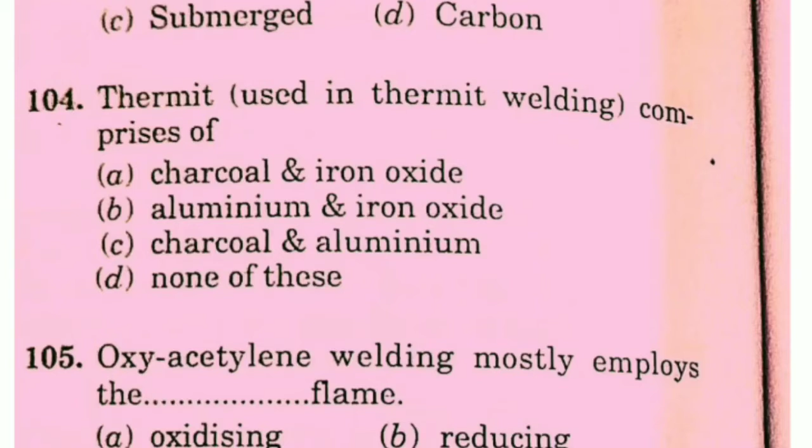Oxyacetylene welding mostly employs the neutral flame. Next, dash welding is usually used to join the ends of two pipes of uniform cross section. Answer: A, offset butt welding. Next, edges of plates do not require beveling if their thickness is less than 5 millimeter.

If T is the thickness of the plate to be spot welded, the electrode tip diameter should be equal to root T. Next, which is a multi-spot welding process? Projection welding, seam welding, both, or neither. Answer: A, projection welding.

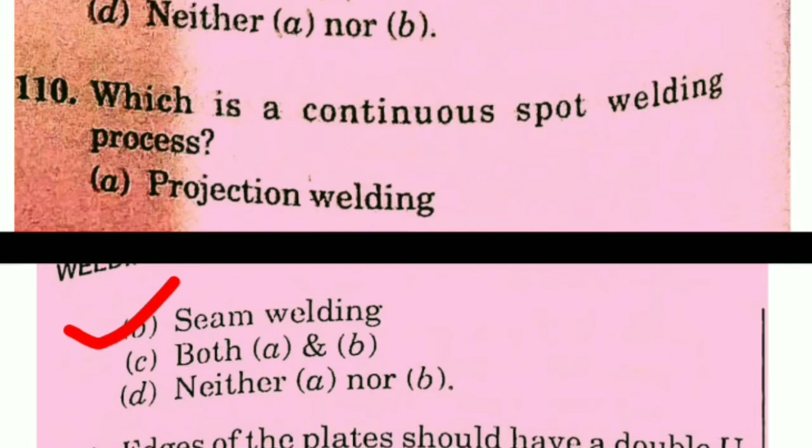Which is a continuous spot welding process? Answer: B, seam welding. Next, edges of the plate should have double U or V grooves on both sides for welding if their thickness is greater than 12.5 millimeter.

Mild steel shanks are joined to high speed drills by flash butt welding. Next, the spacing between two spot welds in spot welding should be greater than 3D.

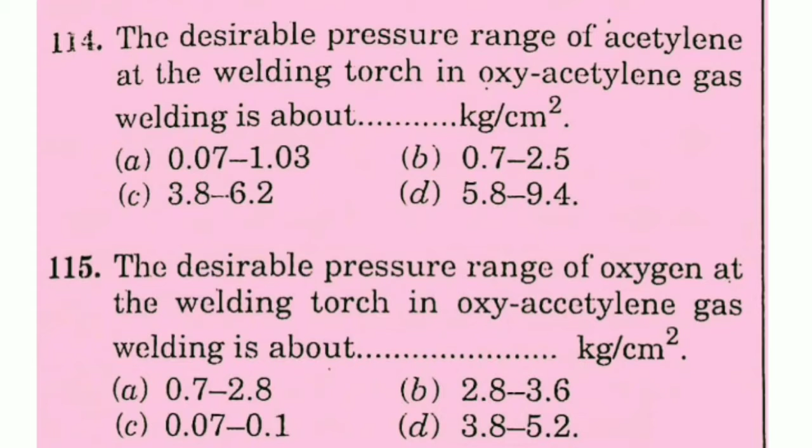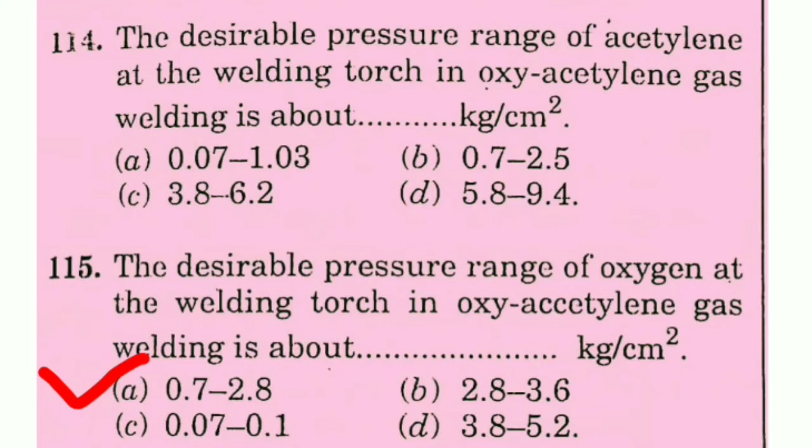The desirable pressure range of oxygen at the welding torch in oxyacetylene gas welding is about 0.7 to 2.8 kg per centimeter square.

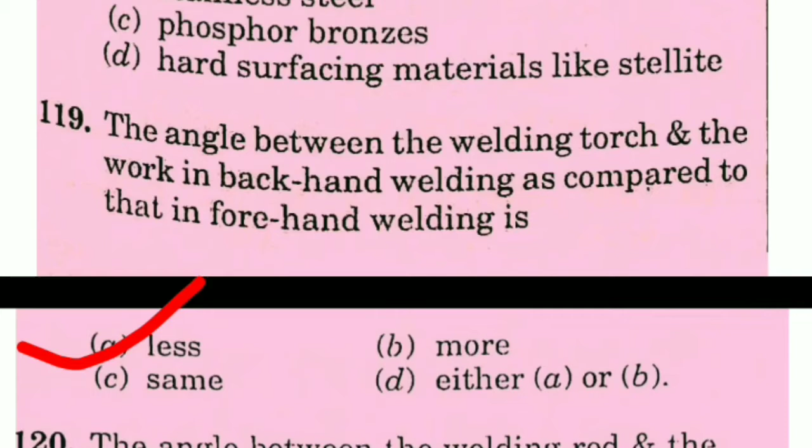The angle between the welding torch and work in backhand welding as compared to that in forehand welding is less, more, same, or A and B. The correct answer is less. The angle between the welding torch and work in backhand welding as compared to forehand welding is less. Next, the angle between the welding rod and the work in forehand welding as compared to that in backhand welding is less, more or same. The angle between the welding rod and the work in forehand welding as compared to backhand welding is more, less or same. The correct answer is C, same.

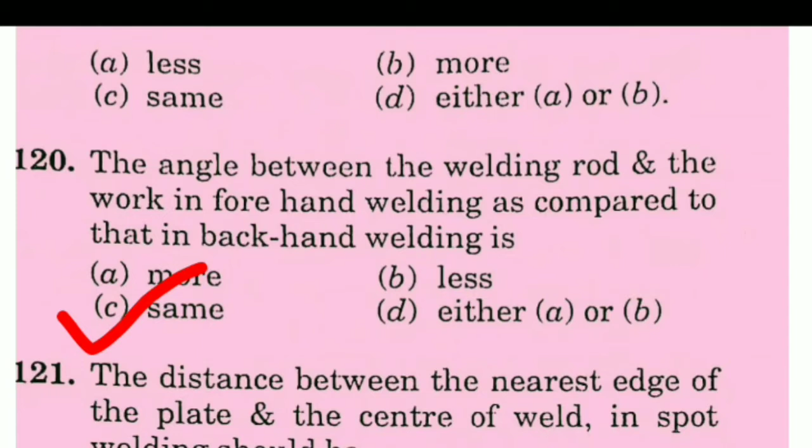Lap joints are preferred for plate having thickness dash millimeter. The correct answer is C, less than 3 millimeter. Lap joints are preferred for plates having thickness less than 3 millimeter.

A pool of molten metal is used in dash arc welding - MIG, TIG, submerged or carbon. The correct answer is submerged. A pool of molten metal is used in submerged arc welding.

Arc is produced between dash electrode and the work in submerged arc welding - bare metal, carbon, metal, none of these. The correct answer is A, bare metal. Arc is produced between a bare metal electrode and the work in submerged arc welding.

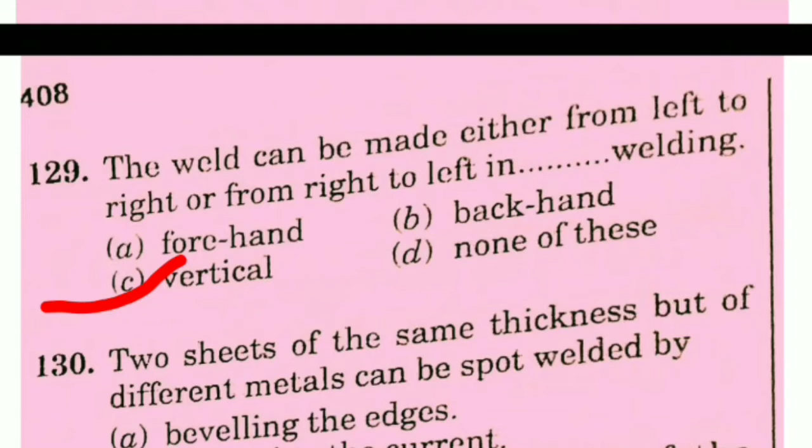The weld can be made either from left to right or from right to left in dash welding - forehand, backhand, vertical, or none of these. The correct answer is C, vertical. The weld can be made either from left to right or from right to left in vertical welding.

Two sheets of the same thickness but of different metal can be spot welded by beveling the edges, increasing the current, changing the size of one of the electrodes, or none of these. The correct answer is C, changing the size of one of the electrodes.

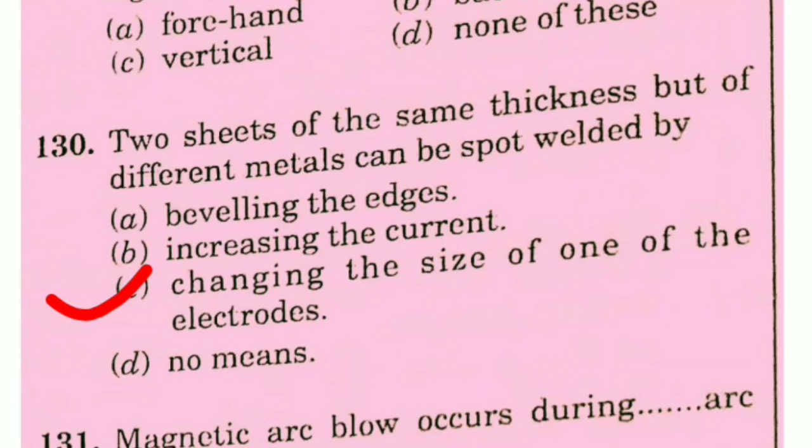The correct answer is B, DC arc welding. The magnetic arc blow occurs during DC arc welding.

During arc welding, the current intensity depends upon the thickness of the plate, electrode diameter, method of edge preparation, or nature of metal. The correct answer is B, electrode diameter. During arc welding, the current intensity depends upon the electrode diameter.

Plates of dissimilar materials of different thickness can be spot welded by beveling the edges, increasing the gap between the plates, controlling the pressure and current, or no means. The correct answer is C, controlling the pressure and current.

Plates of dissimilar materials of different thickness can be spot welded by controlling the pressure and current.

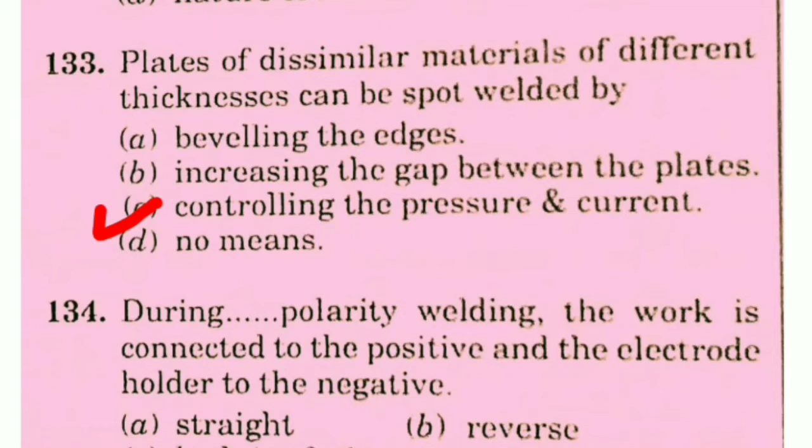During dash polarity welding, the work is connected to the positive and the electrode holder to the negative - straight, reverse, both A and B, or neither A nor B. The correct answer is A, straight.

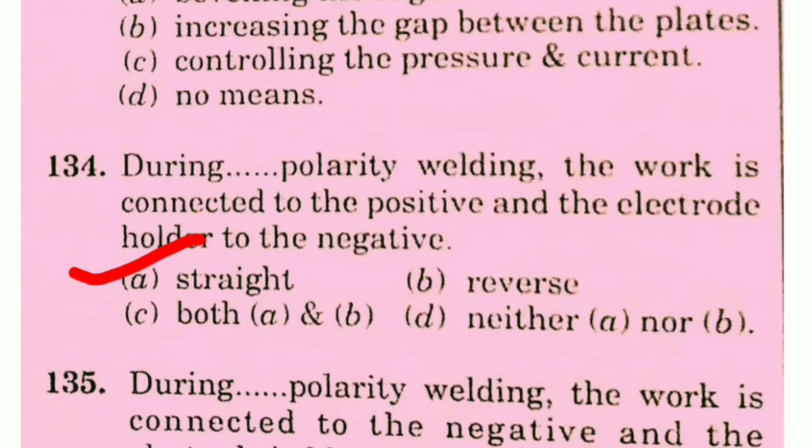During straight polarity welding, the work is connected to the positive and the electrode holder to the negative.

During straight or reverse polarity welding, the work is connected to the negative and the electrode holder to the positive? Straight, reverse, both A and B, or neither A nor B. The correct answer is B, reverse.

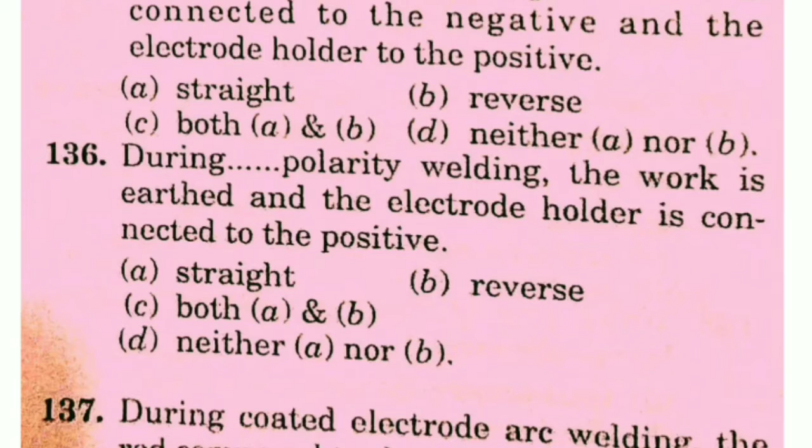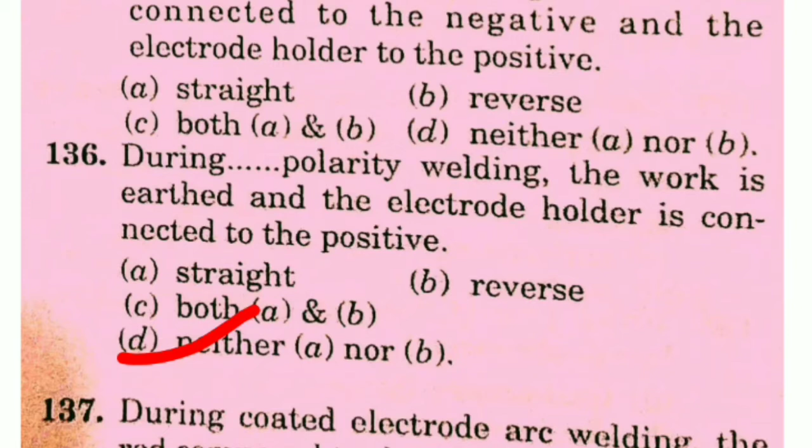During reverse polarity welding, the work is connected to the negative and the electrode holder to the positive. During dash polarity welding, the work is earth and the electrode holder is connected to the positive. Straight, reverse, both A and B, or neither A nor B? The correct answer is D, neither A nor B, meaning neither straight nor reverse.

During coated electrode arc welding, does the rod compared to the coating melt earlier, later, simultaneously, or either earlier or later depending on the polarity used during welding? The correct answer is A, earlier. During coated electrode arc welding, the rod compared to the coating melts earlier.

In which type of welding is a mixture of iron oxide and powdered aluminium ignited by heating? Carbon arc welding, thermit welding, resistance welding, or none of these. The correct answer is B, thermite welding.

In which type of welding is a mixture of iron oxide and powdered aluminium ignited? Thermite welding. Next,

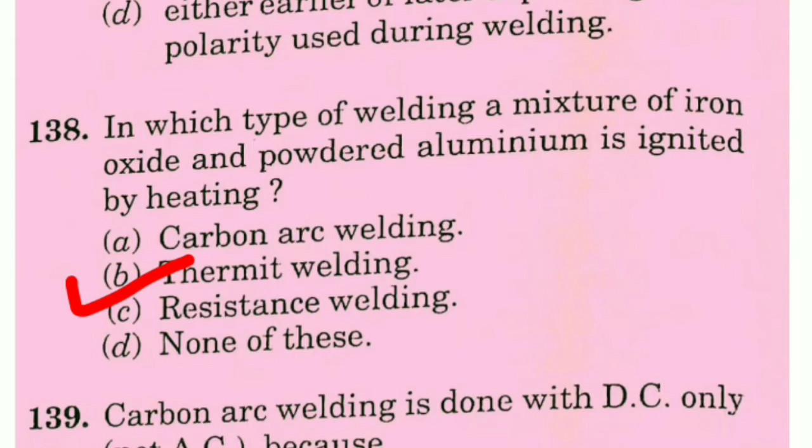Carbon arc welding is done with DC only, not AC, because: no fixed polarity can be maintained in AC, DC can melt the electrode easily, the carbon electrode can work on both polarities, or none of these. The correct answer is A, no fixed polarity can be maintained in AC. Carbon arc welding is done with DC only, not AC, because no fixed polarity can be maintained in AC.

Stainless steel plates can be best gas welded by using which flame? Oxidizing, neutral, carburizing, or either A, B and C. The correct answer is A, oxidizing flame. Stainless steel plate can be best gas welded by using oxidizing flame.

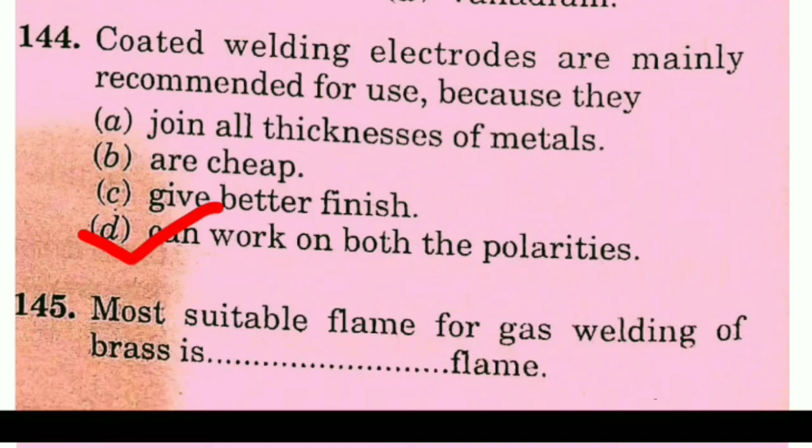Coated welding electrodes are mainly recommended for use because: they join all thickness of metal, are cheap, give better finish, or can work on both polarities. The correct answer is D, can work on both the polarities. Coated welding electrodes are mainly recommended for use because they can work on both the polarities.

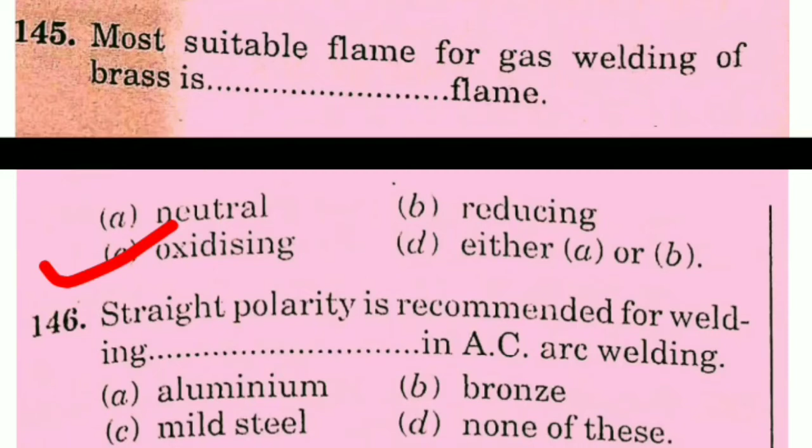Most suitable flame for gas welding of brass is which flame: neutral, reducing, oxidizing, or either A or B? The correct answer is C, oxidizing. Most suitable flame for gas welding of brass is oxidizing flame.

Straight polarity is recommended for welding which material in AC arc welding: aluminium, bronze, mild steel, or none of these? The correct answer is C, mild steel. Straight polarity is recommended for welding mild steel in AC arc welding.

The strength of welded joint of 2 mild steel plates 10 cm thick compared to that of the base metal is generally: more, less, same, or either B or C? The correct answer is A, more. The strength of welded joint of 2 mild steel plates thickness 10 cm compared to that of the base metal is generally more.

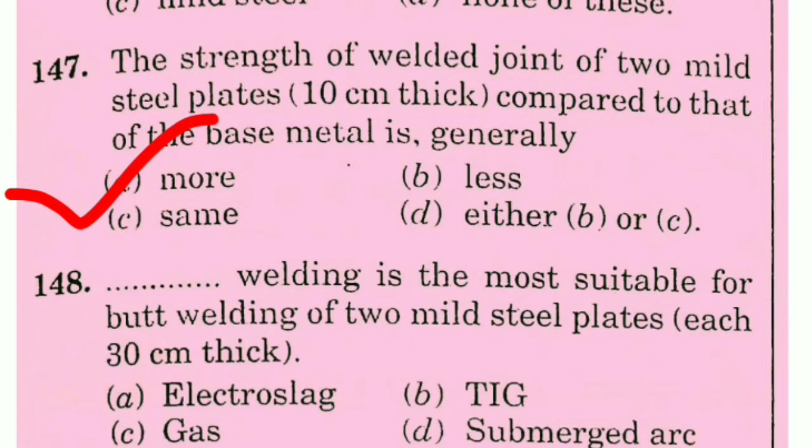Which welding is the most suitable for butt welding of 2 mild steel plates each 30 cm thick? The correct answer is A, electroslag. Electroslag welding is the most suitable for butt welding of 2 mild steel plates each 30 cm thick.

Heat generated in the workpiece in case of resistance welding depends on: the magnitude of welding current, the time current is allowed to flow, the resistance of the current conducting path, or all of ABC. The correct answer is D, all of ABC. Heat generated in the workpiece in case of resistance welding depends on the magnitude of welding current, the time current is allowed to flow, and the resistance of the current conducting path.

The ratio of iron oxide to aluminium in the thermit mixture is: the correct answer is A, 3:1.

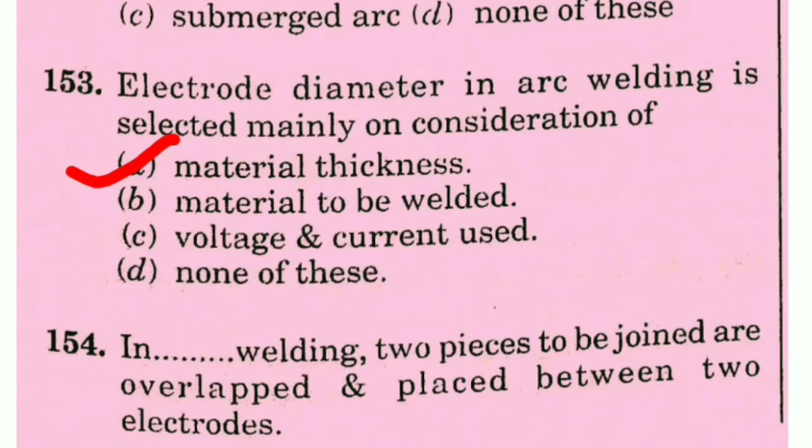Electrode diameter in arc welding is selected mainly on consideration of: material thickness, material to be welded, voltage and current used, or none of these? The correct answer is material thickness. Electrode diameter in arc welding is selected mainly on consideration of material thickness.

In dash welding, two pieces to be joined are overlapped and placed between two electrodes: seam welding, spot welding, butt welding, or projection welding? The correct answer is spot welding. In spot welding, two pieces to be joined are overlapped and placed between two electrodes.

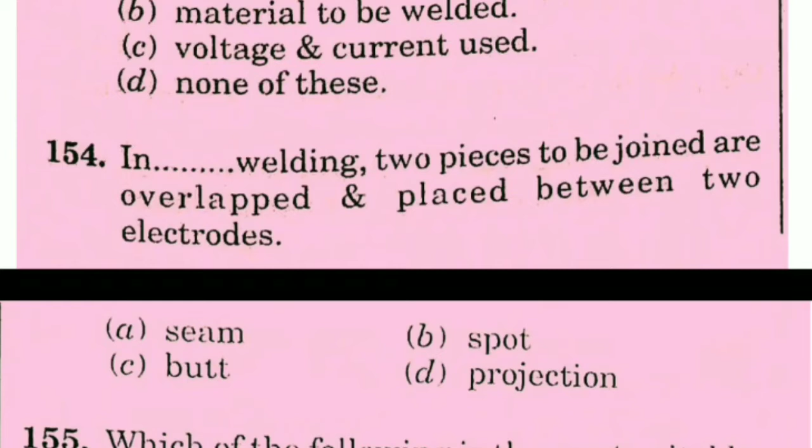Which of the following is the most suitable for joining two stainless steel foils of 0.1 mm thickness: electroslag welding, gas welding, MIG welding, or TIG welding? The correct answer is gas welding.

The acetylene cylinder is filled with a material saturated with: calcination carbide, calcium carbide, acetone, or none of these? The correct answer is acetone. The acetylene cylinder is filled with a material saturated with acetone.

Metals like copper and brass are welded using dash flame. The correct answer is oxidizing flame. Metals like copper and brass are welded using oxidizing flame.

Solder essentially has a dash base: tin base, tin lead, tin silver, silver lead, or bismuth lead? The correct answer is tin lead base. Solder essentially has a tin lead base.

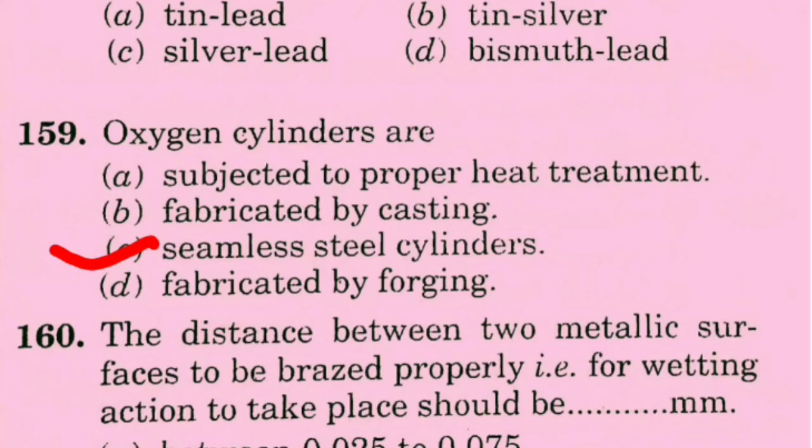Oxygen cylinders are subject to proper heat treatment: fabricated by casting, seamless steel cylinder, or fabricated by forging? The correct answer is seamless steel cylinder. Oxygen cylinders are seamless steel cylinders.

The distance between two metallic surfaces to be brazed properly, that is for wetting action to take place, should be dash millimeter: between 0.025 to 0.075, less than 0.025, greater than 0.5, or greater than 0.25? The correct answer is between 0.025 to 0.075 millimeter. The distance between two metallic surfaces to be brazed properly, for wetting action to take place, should be between 0.025 to 0.075 millimeter.

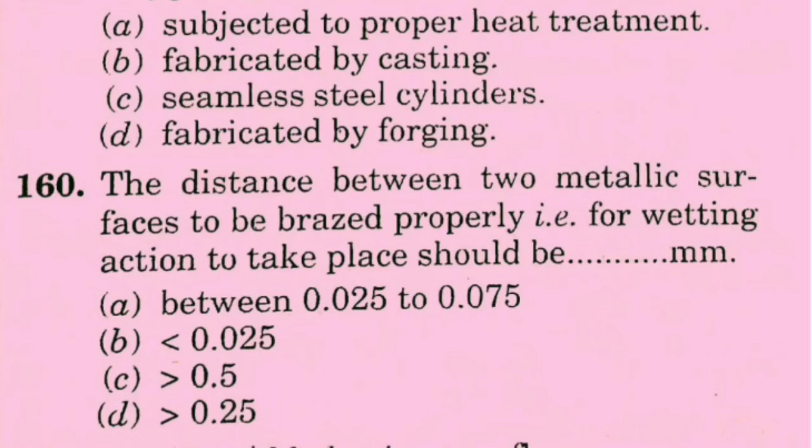Steel is welded using dash flame: carburizing, neutral, oxidizing, or none of these? The correct answer is neutral flame.

Steel is welded using neutral flame. Stainless steel is welded using dash flame: carburizing, neutral, oxidizing, or none of these? The correct answer is carburizing flame. Stainless steel is welded using carburizing flame.

The oxidizing flame compared to carburizing flame is: less luminous, more luminous, equally luminous, or unpredictable? The correct answer is less luminous. The oxidizing flame compared to carburizing flame is less luminous.

Dash flame is the most commonly used flame in gas welding: neutral, carburizing, oxidizing, or none of these? The correct answer is neutral flame. Neutral flame is the most commonly used flame in gas welding.

Electrode gets consumed in dash welding: thermite, gas, resistance, or arc? The correct answer is arc welding. Electrode gets consumed in arc welding. Next, dash welding uses consumable electrode.

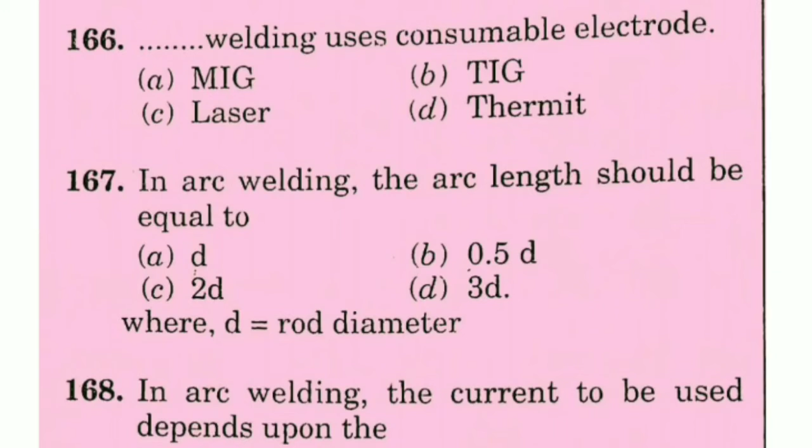The correct answer is MIG welding. MIG welding uses consumable electrode.

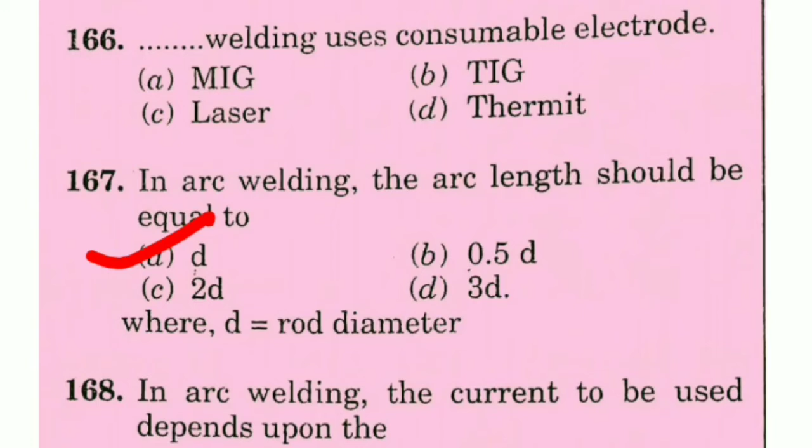In arc welding the arc length should be equal to: D, 0.5D, 2D, or 3D, where D is equal to rod diameter? The correct answer is D. In arc welding the arc length should be equal to D.

In arc welding the current to be used depends upon: material thickness, arc gap, electrode rod thickness, or none of these? The correct answer is electrode rod thickness. In arc welding the current to be used depends upon the electrode rod thickness.

Which of the following is the most suitable for butt welding of two mild steel plates of 20 centimeters thickness for a boiler drum: electroslag welding, electrical resistance welding, submerged arc welding, or MIG welding? The correct answer is electroslag welding.

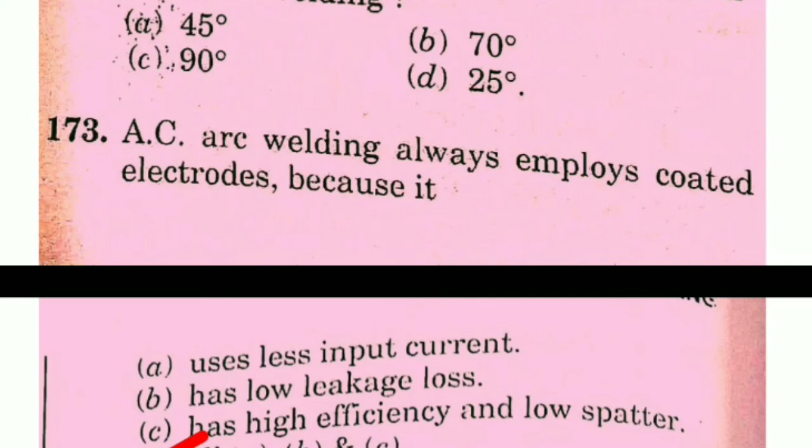Next, AC arc welding always employs coated electrode because it uses less input current, has low leakage loss, has high efficiency and low spatter, या all of above। इसका सही आंसर है all of above। AC arc welding always employs coated electrode because it uses less input current, has low leakage loss, has high efficiency and low spatter, all ABC।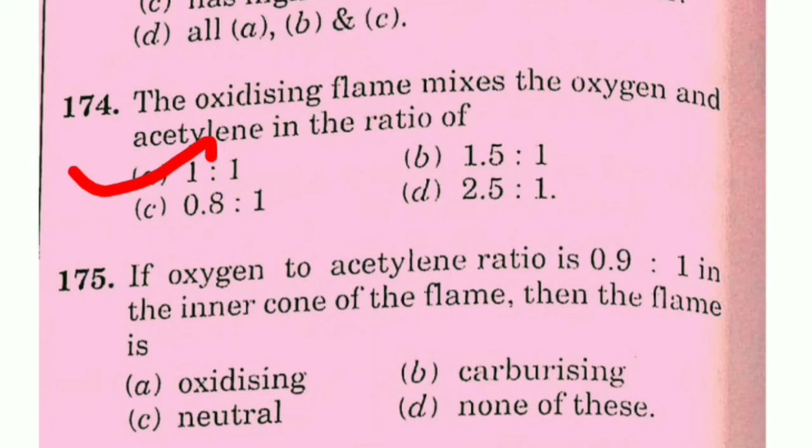Next is the oxidizing flame mixes the oxygen and acetylene in the ratio of 1:1, 1.5:1 या 0.8:1 या 2.5:1। इसका सही आंसर है 1:1, ऑप्शन नंबर ए। The oxidizing flame mixes the oxygen and acetylene in the ratio of 1:1।

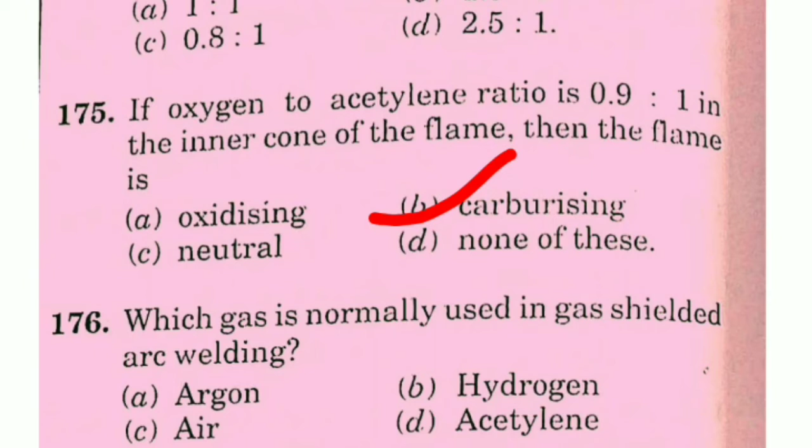Next, if oxygen to acetylene ratio is 0.9:1 in the inner cone of the flame, then the flame is oxidizing, carburizing, neutral या none of these। इसका सही आंसर है बी, carburizing flame। If oxygen to acetylene ratio is 0.9:1 in the inner cone of the flame, then the flame is carburizing।

Next, which gas is normally used in gas shielded arc welding? इसका सही आंसर है आर्गन, ऑप्शन नंबर ए। Which gas is normally used in gas shielded arc welding? Argon।

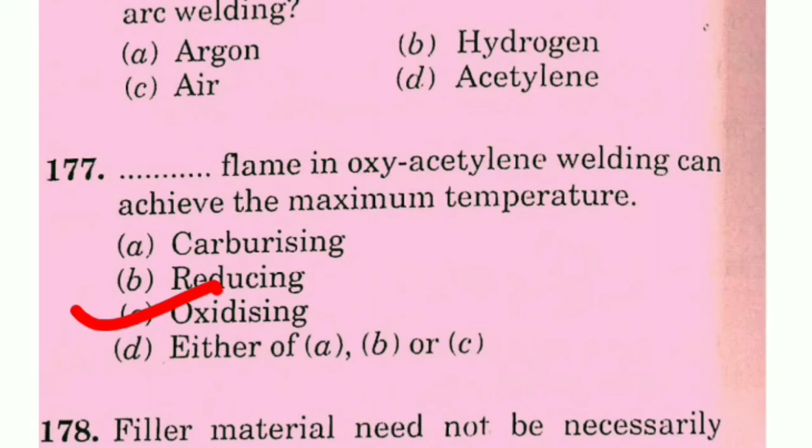Next is dash flame in oxyacetylene welding can achieve the maximum temperature: carburizing, reducing, oxidizing या either A, B और C। इसका सही आंसर है C, oxidizing। Oxidizing flame in oxyacetylene welding can achieve the maximum temperature।

Next is filler material need not be necessarily used in case of soldering, brazing, welding या both B and C। इसका सही आंसर है C, welding। Filler material need not be necessarily used in case of welding।

Next, temperature above which brazing is done is dash degree centigrade। इसका सही आंसर है 225 डिग्री सेंटीग्रेड। Temperature above which brazing is done is 225 degree centigrade।

Next, seamless pipe have dash strength and corrosion resistance as compared to welded pipes: lower, higher, same या either A और B depend on the pipe materials। इसका सही आंसर है दोस्तों ऑप्शन बी। Seamless pipe have higher strength and corrosion resistance as compared to welded pipe।

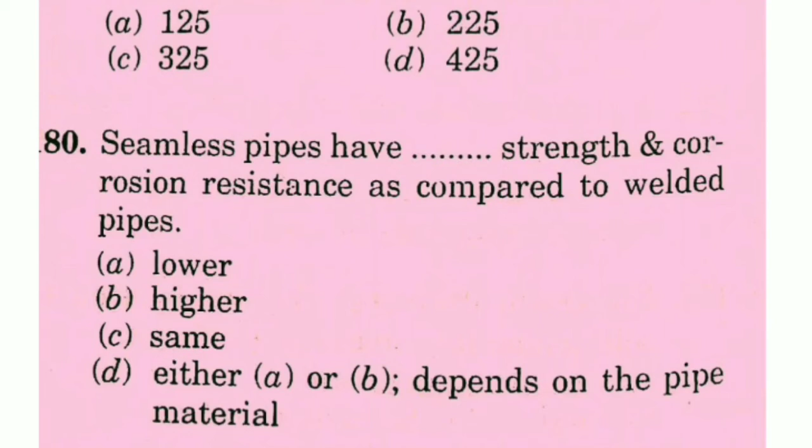Next, weld decay may occur in dash steel when heated to 500 से 800 डिग्री सेंटीग्रेड। इसका सही आंसर है दोस्तों ऑप्शन नंबर बी, स्टेनलेस स्टील। Weld decay may occur in stainless steel when heated to 500 से 800 डिग्री सेंटीग्रेड।

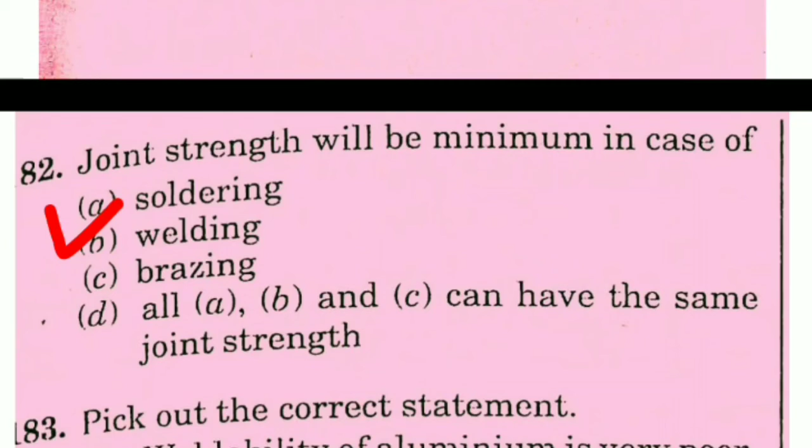Next, joint strength will be minimum in case of soldering, welding, brazing या all A, B and C can have the same joint strength। इसका सही आंसर है दोस्तों ऑप्शन नंबर ए, soldering। Joint strength will be minimum in case of soldering।

Next, pick out the correct statement. Weldability of aluminium is very poor hence it is subjected to brazing. Those metals which are capable of forming a continuous series of solid solution with each other exhibit good weldability. Highest temperature is achieved in oxyacetylene welding in outer portion of the flame, and none of these. इसका सही आंसर है बी.

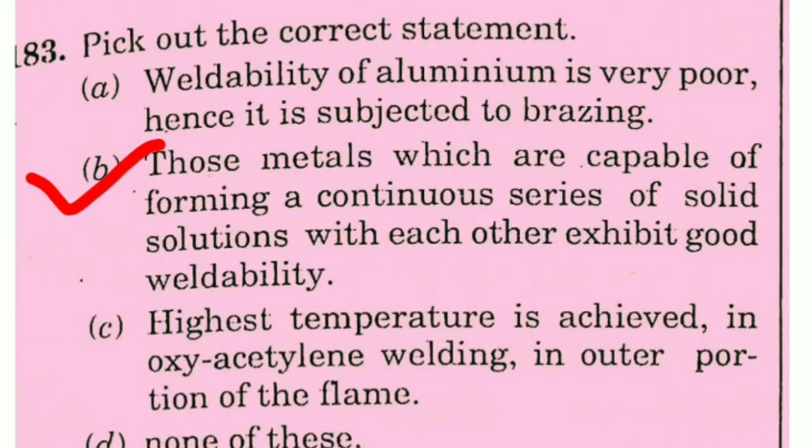Pick out the correct statement. Those metals which are capable of forming a continuous series of solid solution with each other exhibit good weldability. Option number B.

Solder is a dash base alloy: निकेल, टिन, लीड या बोथ बी एंड सी. इसका सही आंसर है डी, बोथ बी एंड सी, मतलब टिन एंड लीड बेस alloy. Solder is a tin and lead base alloy.

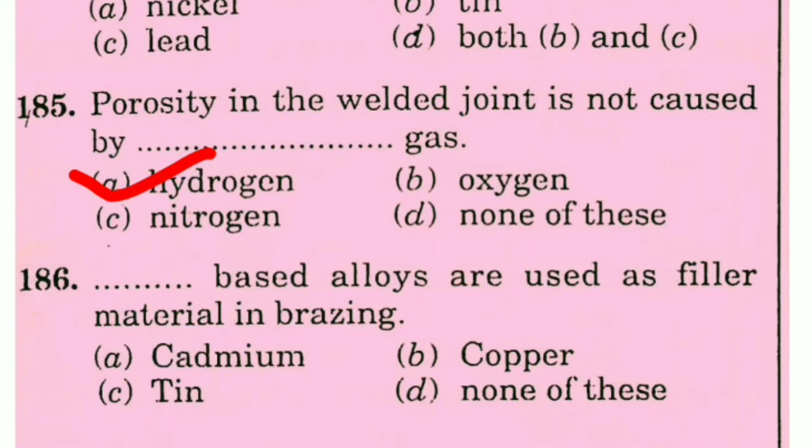Next, porosity in the welded joint is not caused by dash gas. इसका सही आंसर है ऑप्शन नंबर ए, हाइड्रोजन. Porosity in the welded joint is not caused by hydrogen gas.

Next, dash-based alloy are used as filler material in brazing: cadmium, copper, tin या none of these. इसका सही आंसर है कॉपर, ऑप्शन नंबर बी. Copper-based alloy are used as filler material in brazing.

Next, which of the following may not essentially be a non-pressure type welding process? Submerged welding, thermite welding, metal arc welding या none of these. इसका सही आंसर है thermite welding, ऑप्शन बी. Which of the following may not essentially be a non-pressure type welding process? ये सही आंसर है thermite welding.

Next, which of the following metallurgical process is not involved in a welding process? Heat treatment, change in grain structure, fusion, none of these. इसका सही आंसर है दोस्तों none of these, ऑप्शन नंबर डी. Which of the following metallurgical process is not involved in a welding process? Heat treatment, change in grain structure, fusion या none of these. इसका सही आंसर है none of these.

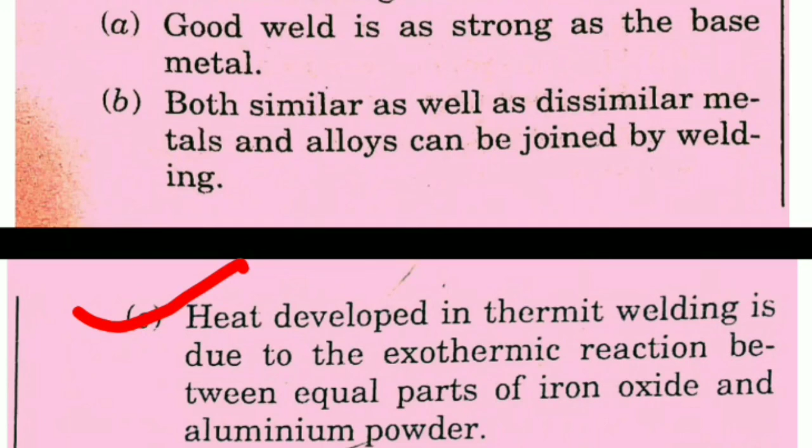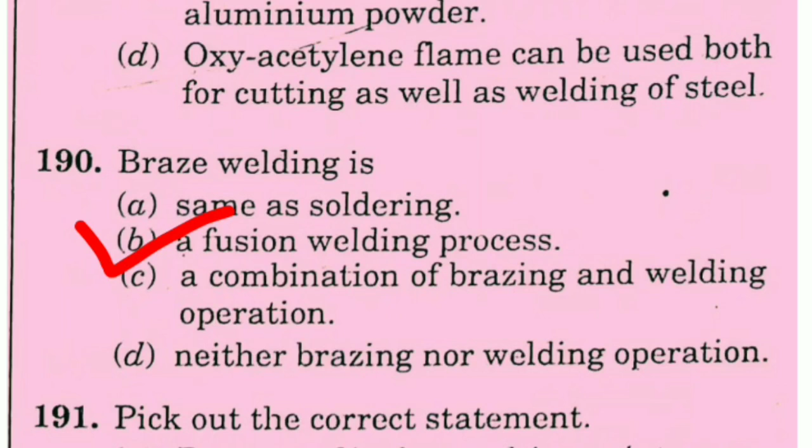Heat developed in thermite welding is due to the exothermic reaction between equal parts of iron oxide and aluminum powder. Next is braze welding is same as soldering, a fusion welding process, या combination of brazing and welding operation, या neither brazing nor welding operation. इसका सही आंसर है दोस्तों बी, a fusion welding process. Braze welding is a fusion welding process.

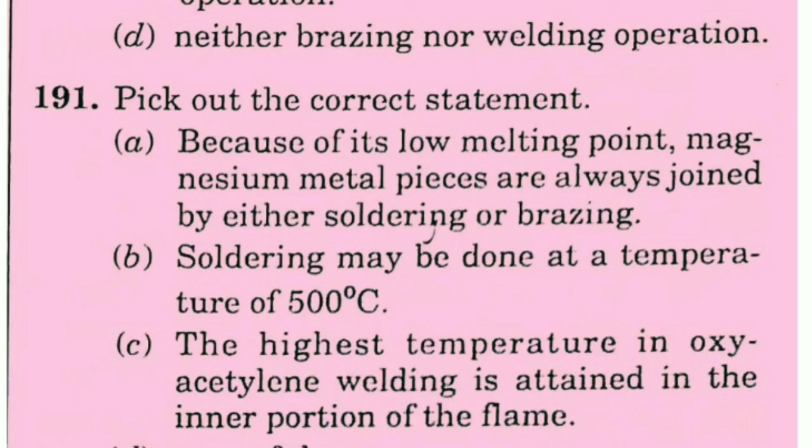Next, pick out the correct statement. Because of its low melting point, magnesium metal pieces are always joined by either soldering or brazing. B. Soldering may be done at a temperature of 500 degrees centigrade. The highest temperature in oxyacetylene welding is attained in the inner portion of the flame, या none of these. इसका सही आंसर है सी. The highest temperature in oxyacetylene welding is attained in the inner portion of the flame.

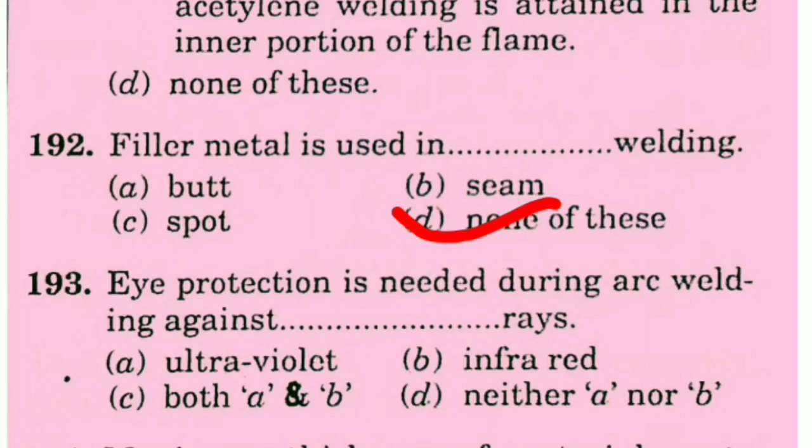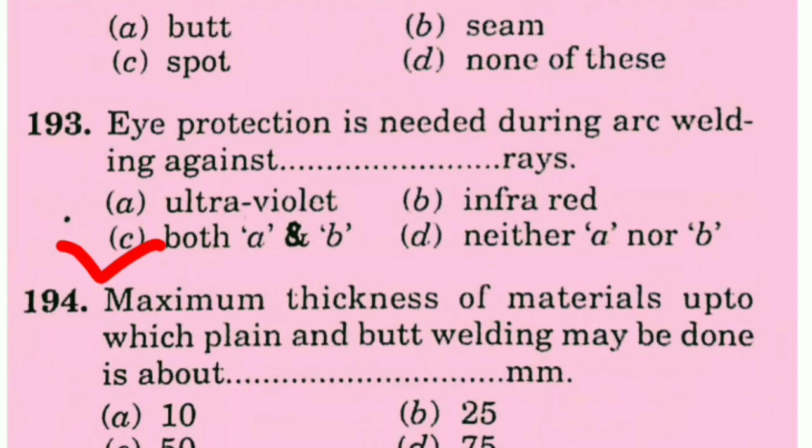Next is filler metal is used in dash welding: butt, seam, spot, या none of these. इसका सही आंसर है डी, none of these. Next is eye protection is needed during arc welding against dash rays: ultraviolet, infrared, both A and B, या neither A nor B. इसका सही आंसर है दोस्तों सी, both A and B. Eye protection is needed during arc welding against ultraviolet and infrared rays.

Next, maximum thickness of material up to which plain butt welding may be done is about: 10, 25, 50 या 75 millimeter. इसका सही आंसर है बी, 25 मिलीमीटर. Next is dash welding is the most suitable for welding grey cast iron: oxyacetylene, arc, submerged arc या TIG. इसका सही आंसर है ए, oxyacetylene. Oxyacetylene welding is the most suitable for welding grey cast iron.

Next, edge preparation for welding is not required if the plate thickness is less than dash millimeter. इसका सही आंसर है ए, 4 millimeter. Edge preparation for welding is not required if the plate thickness is less than 4 millimeter. Next, welding of dash essentially requires preheating: एल्यूमिनियम, कास्ट आयरन, स्टेनलेस स्टील या हाई स्पीड स्टील. इसका सही आंसर है दोस्तों बी, कास्ट आयरन.

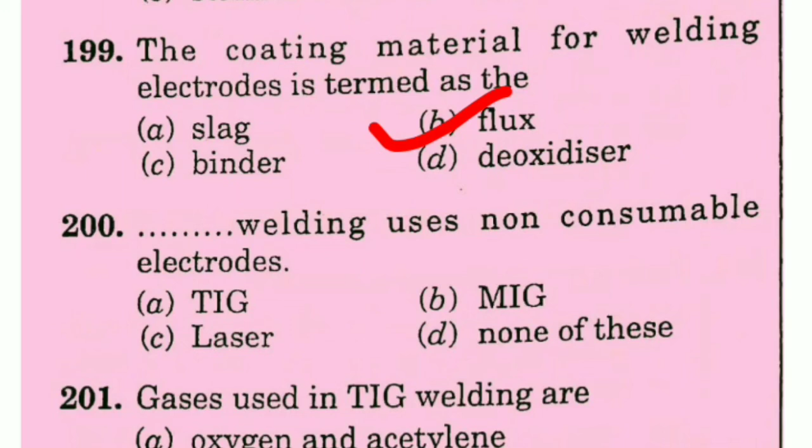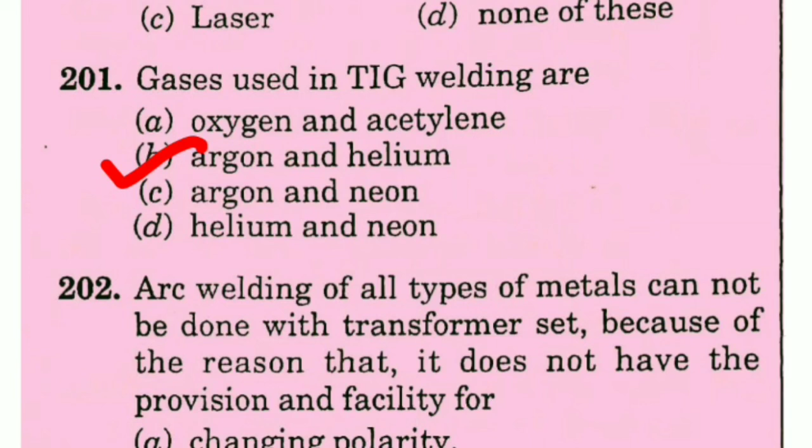Next, dash welding uses non-consumable electrode: TIG, MIG, laser या none of these. सही आंसर है TIG welding. TIG welding uses non-consumable electrode. Next, gases used in TIG welding are: oxygen and acetylene, argon and helium, argon and neon, helium और neon. इसका सही आंसर है बी, argon and helium.

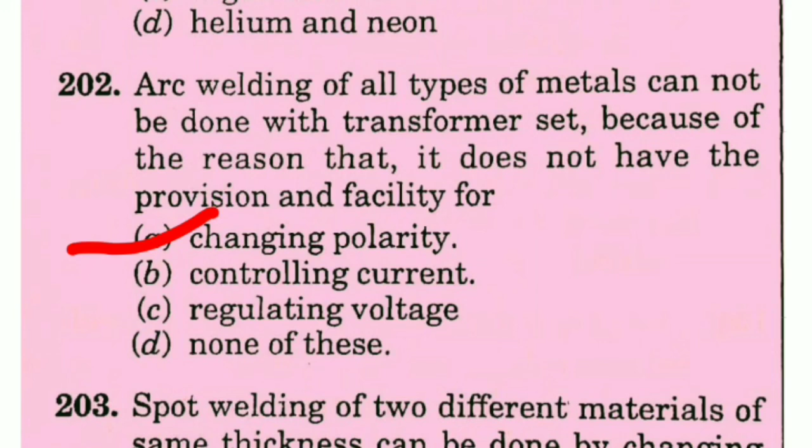Next is arc welding of all types of metal cannot be done with transformer set because of the reason that it does not have the provision and facility for changing polarity, controlling current, regulating voltage या none of these. इसका सही आंसर है ऑप्शन ए, changing polarity. Arc welding of all types of metals cannot be done with transformer set because it does not have the provision and facility for changing polarity.

Next, spot welding of two different materials of same thickness can be done by changing the pressure applied, current, size of one electrode, time duration of current. इसका सही आंसर है ऑप्शन सी, size of one electrode. Next, widest application of laser welding is in the dash industry: electronic, heavy process या structural work. इसका सही आंसर है ऑप्शन ए, electronic industry. Widest application of laser welding is in the electronic industry.